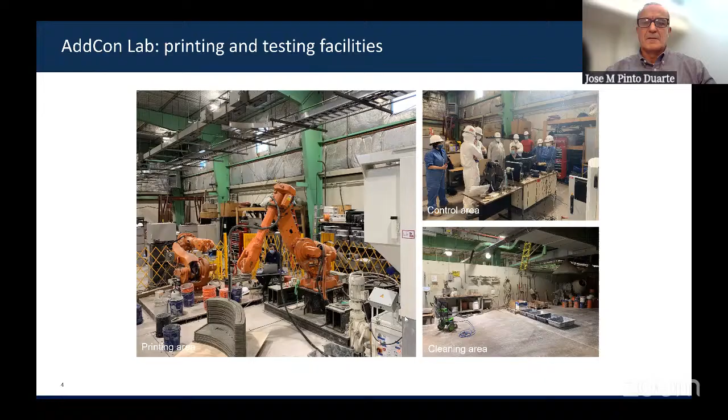So the mission goals of the lab is to support the integration of digital technologies in design and construction, contribute to the achievement of the United Nations Sustainable Development Goals. But I should say that the focus is not on technology, but on strategically deploying technology to address contemporary social issues.

So what's the solution? The solution that we have been advocating is to use digital design and production systems, meaning systems that are controlled by computer systems. Basically, the design system reads information about the context and outputs a solution, and the production system uses that solution to actually materialize it.

The basic idea is to have rule-based design systems that will even allow lay people to design their own houses. This works not just at the housing level, but also at the urban level. Then we use artificial intelligence to optimize the design for specific requirements, like minimizing energy consumption or maximizing the capture of sunlight and so on.

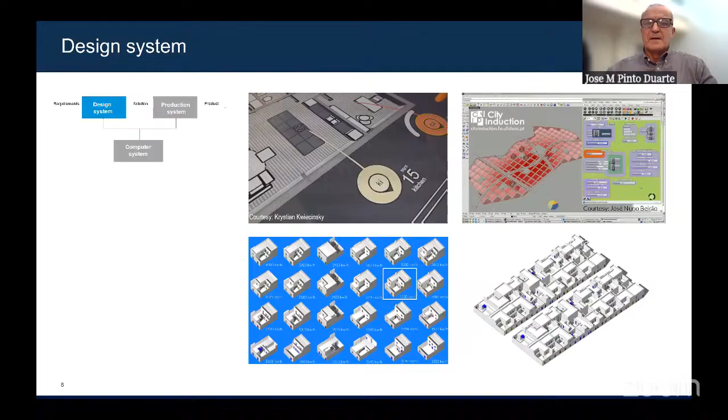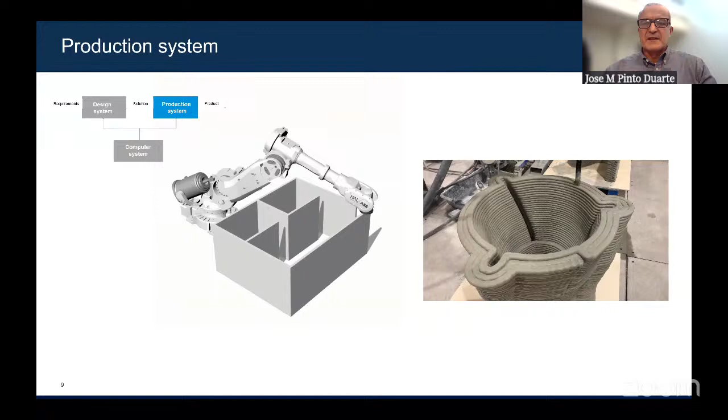The goal of the lab is to develop a mathematical model of the process of 3D printing. 3D printing is a very complex process with many different variables, like environmental variables such as temperature and humidity, the material composition of the mixture that's going to be extruded, the type of binder, the type of aggregates, the admixtures, use of fibers, and so on.

This has an impact on material properties, like flowability, printability, setting time, density, strength, and so on. Then you have variables connected to the printing system, like the dry feed rate, the water flow rate, the pump speed, the speed of the robotic arm, the length and diameter of the hose, and so on. Then design variables like the filament shape in terms of height and width, the number of filaments and layers, and the specific tool paths used to extrude the material. And then variables associated with the building itself, like shape, size, textures, colors, and so on.

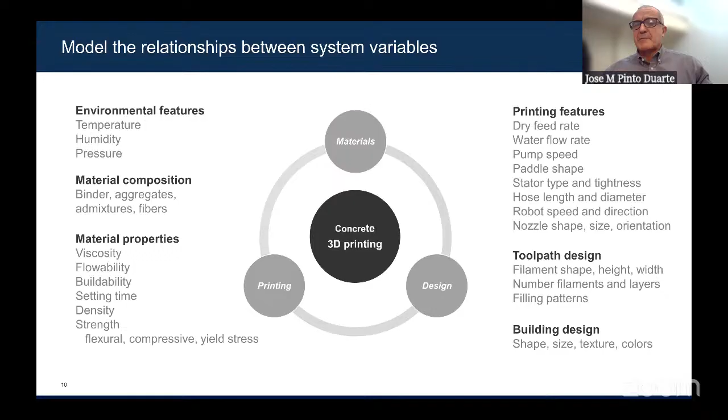What we are trying to do is create a mathematical model relating all these variables so we have complete control of the process. So let's talk about each of these elements one at a time.

About materials: our goal is to develop sustainable extrudable mixtures. As you know, Portland cement is not a very sustainable material because it consumes a lot of energy to be produced, and has very big CO2 emissions. So we are trying to develop new types of concrete that do not consume as much energy as Portland cement and have less carbon emissions. We are looking at magnesium oxide, magnesium sulfate, citric acid, and so on as the main trigger of the binder.

We are also developing lightweight mixtures, which you can obtain, for instance, by replacing river sand in the concrete mixtures with lightweight materials like cork granules, expanded clay, or styrofoam. The idea is to develop mixtures that are lighter and therefore have better performance in terms of thermal insulation, or do not impose such a big weight on the structure - the self-weight will be decreased. That's an example of the type of material we are developing.

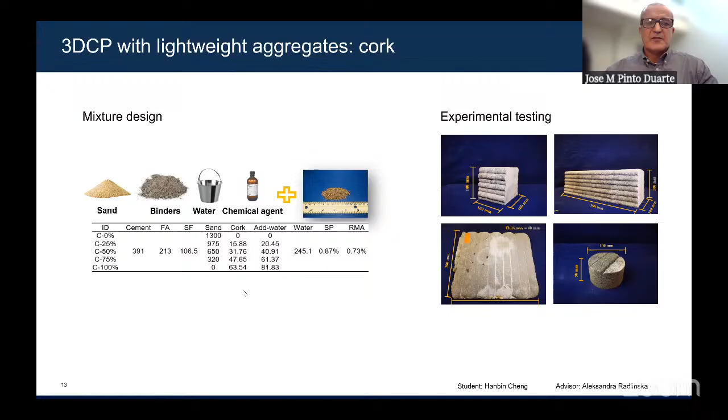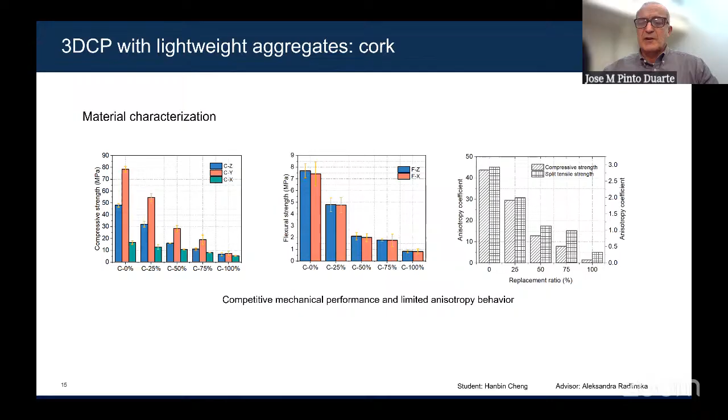What we do in this case is try to understand the material properties. For instance, we replace the river sand by cork in different amounts, like 25, 50, 75, and 100%, and see what properties we obtain. Is the material still pumpable? Does it flow? What's the open time? We also look at the mechanical performance of the mixture for different amounts of cork, and see if we can be within the range required by current building codes. That's what these graphs are trying to show.

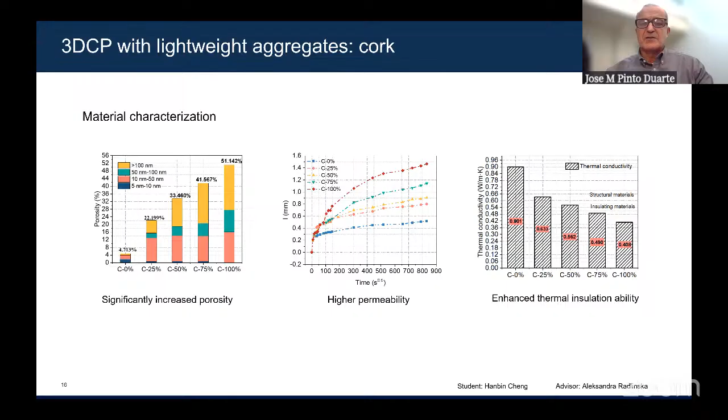In this case, also in terms of permeability and thermal insulation - as you can see, as we increase the amount of cork, the conductivity of the material decreases, so it gets better performance in terms of thermal insulation. So basically, you have to deal with all these aspects: strength on one side, thermal insulation on the other, pumpability as well, and so on. This requires extensive testing to find out what ranges of cork replacement allow you to have a mixture that works, that is flowable and has the right strength.

Another example is expanded polystyrene. This is another type of concrete we are trying to explore and develop. Basically, these materials decrease density and increase insulation properties of printable concrete, but also transform the mechanical properties to be more ductile, allowing it to withstand considerable deflection. So not just thermal insulation, but also improvements in terms of deflection.

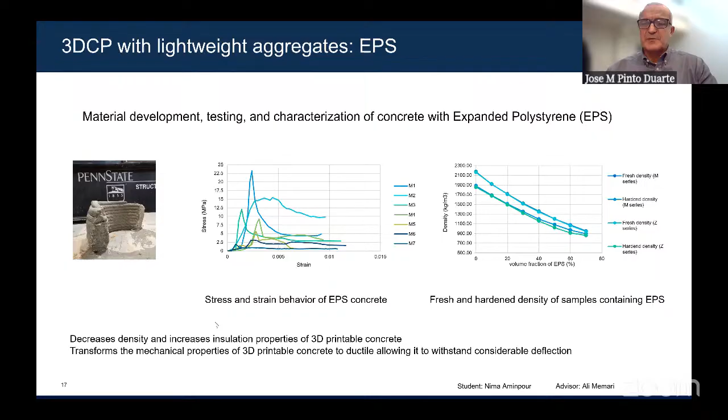This is the work of one of my PhD students a few years ago.

How can we accomplish this? You basically have two pumps, one with concrete with river sand and the other with concrete with cork granules. By changing the relative speed of each pump, you can increase or decrease the gradient of cork, and therefore, when you deposit the material in space, you deposit it with the properties you want, fully customizing the design of the building element.

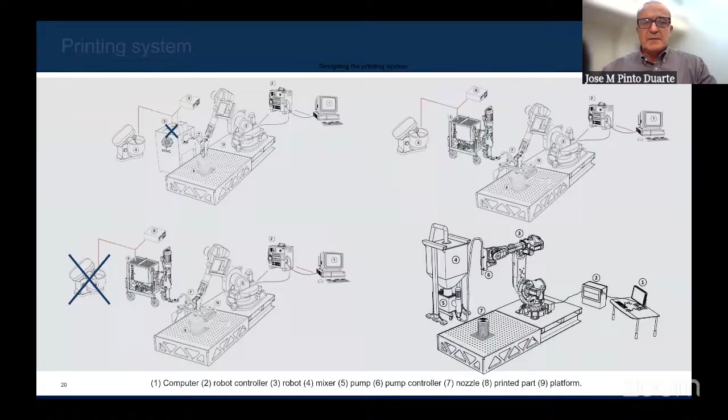Now about the printing system. We started very small, with a very portable robotic arm and a very portable printer in a small room. As time went by, we continued increasing the quality and performance of the printing system, and we increased the size, so we had to move the lab several times as we were developing it. At the bottom right is the system we now have at the lab.

A system to print with concrete needs a computer, a controller that controls the robot, and the robot itself. The mixer mixes the dry mix with water, then the pump extrudes the fresh material through a hose that ends at the nozzle, which is controlled by the robotic arm. The arm then moves according to the code instructions to print the parts on a platform.

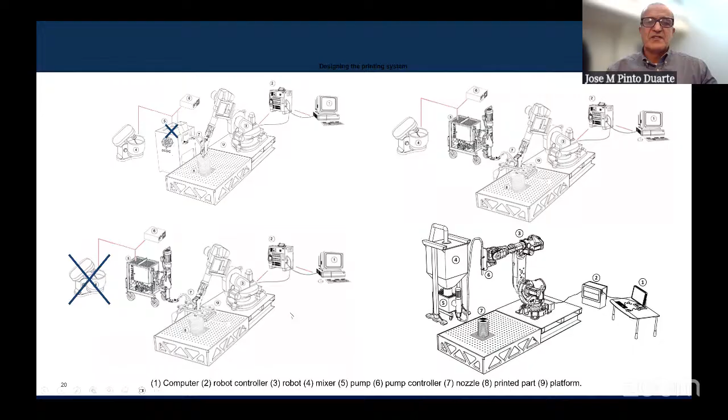We continued developing the system, and we created a company, X-Hab 3D, to sell the printing system we developed at the lab.

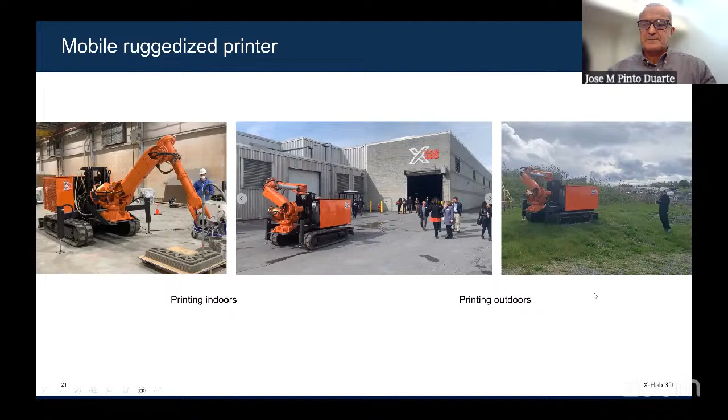Now, we've talked about the whole system, but there are also details that can be improved and developed in a more sophisticated way. For instance, we're developing a nozzle we call the smart nozzle, which has several capabilities. One is that it rotates to remain perpendicular to the tool path, so as you curve, the nozzle rotates to stay in the same position relative to the printed filament.

This has several advantages. One is to increase the strength of the material, but it also allows you to design more complex shapes, and to control the direction of fibers in the concrete filaments.

With the rotation nozzle, you can use different types of endings to extrude the material in different shapes. For example, you can use a trowel to smooth the surface so the lines become faded as you print, which increases the strength of the wall of the building component.

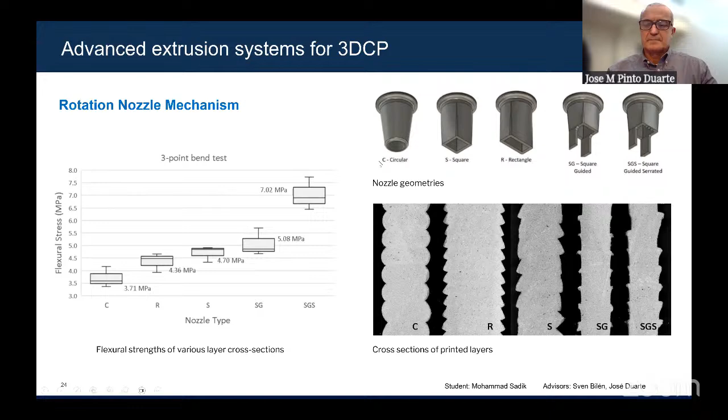And then the other capability is to add the admixture. There are different types of admixtures. One can be an accelerant. The accelerant reduces the time for the material to get hard.

If you do that immediately before extrusion, the material retains good flowability properties while it's going through the hose. And then once it's extruded, it will harden very fast.

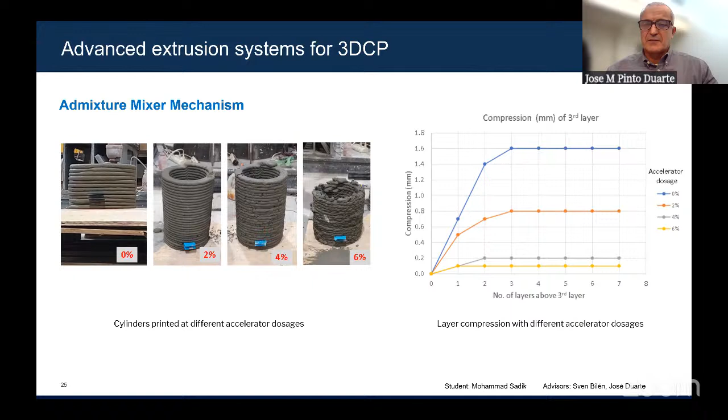And then another aspect is a closed feedback loop. When you are printing, we need at least 3 people: one controlling the robot, one controlling the extruder, and another overseeing the operations. You need to keep an eye on how things are going, like if the material becomes too wet or too dry.

So you need to adjust the settings in real time. For instance, you need to increase or decrease the amount of water, or the pump speed, or the robotic arm speed. So what we are trying to do is automate this process, finding a way to monitor the printing process that requires fewer people.

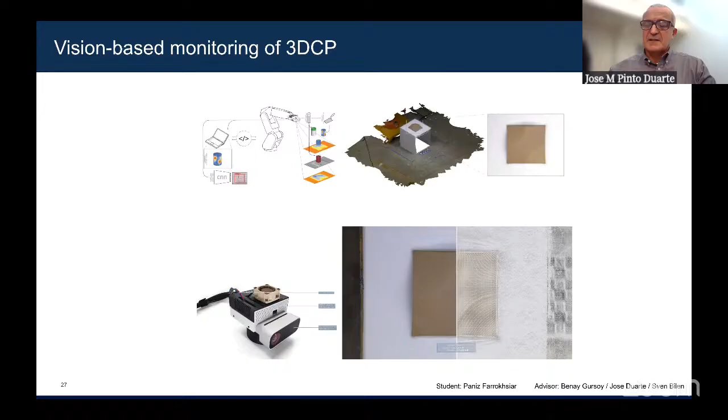So we are looking at vision-based monitoring of the concrete printing operations. We have a camera attached to the robotic arm that follows the printing process and is able to detect variations in the shape of the filament and immediately trigger procedures if something goes wrong.

There are different ways of using systems like these. One is before you start printing, like for instance if you want to print on a site that's not leveled or regular. We use this system to create a 3D model of the site. It will scan the site and adjust the toolpath to the irregularities of the terrain to make sure the nozzle does not get buried in the ground. So this is a use of the system before printing starts.

And then you can use the system during printing to monitor the quality of printing, the shape of the filament, the shape of the layer, the shape of the entire part, to see if it's deforming, and if it's deforming, what might be the cause. It could lead to structural failure if you don't act.

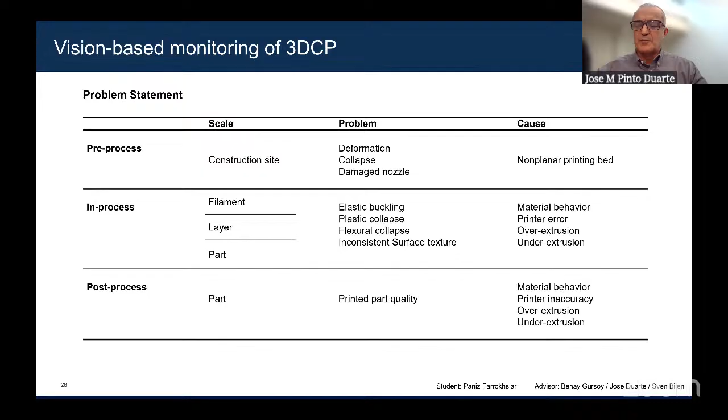So if you follow the process this way, you can change the printing settings to remain within the acceptable right values, so that the variables stay correct. You can also use the system after you print, just to compare the shape of the printed parts with the shape of the design and see if there were any deviations, to guarantee that we achieve good printing quality. So that's basically the idea.

This is the work of another PhD student to detect, predict, and prevent geometrical defects in concrete printing, and how to adjust the toolpaths and printing settings in real time to prevent that from happening. You can see some images of the machine and the process being used.

We are basically using shape grammar rules to decode what the machine sees, what the camera sees, and define and trigger the right action, which might be, as I mentioned before, the content of water, the speed of the pump, the speed of the robotic arm, or even a change in the toolpath.

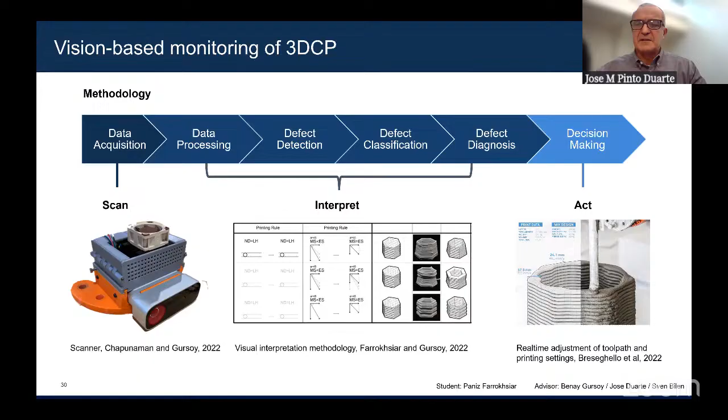So basically, we have 3 steps: scan, interpret what the camera sees, and then act to correct what's not going well. This is how you can use the system in a more elaborate way: data acquisition, data processing, defect detection, defect classification, diagnosis, meaning finding out what might be causing the problem, and then deciding which action to take to counteract what's going on.

So basically, with this way, we can achieve very good control of the shape of the printing filament, and you can adjust the toolpath in real time to changes detected during the printing process.

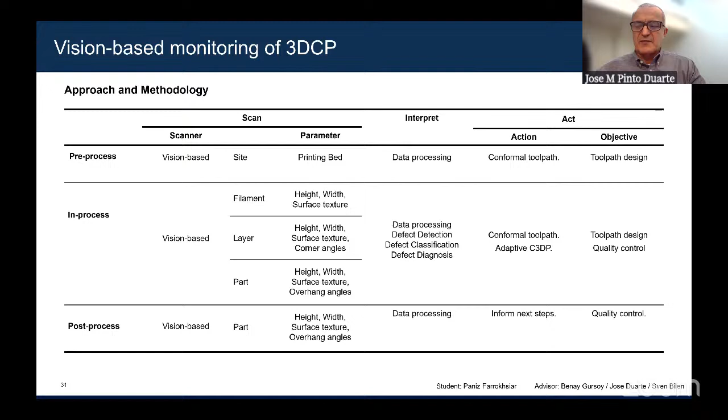So another area of work is reinforcement. As you know, concrete has very good compressive strength behavior, but not very good in terms of flexural strength. So it's important to use reinforcements like steel, FRP rebars, and other types of meshes to increase the flexural strength of the printed part. So we conduct several types of tests to find out the compressive and flexural strength of the mixtures we are producing, and then determine which type of reinforcement needs to be used.

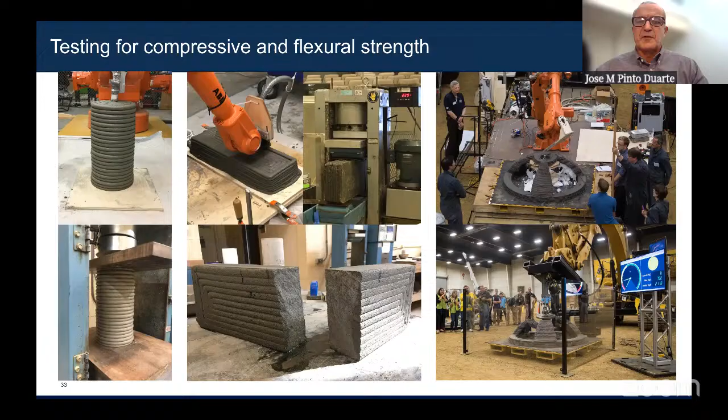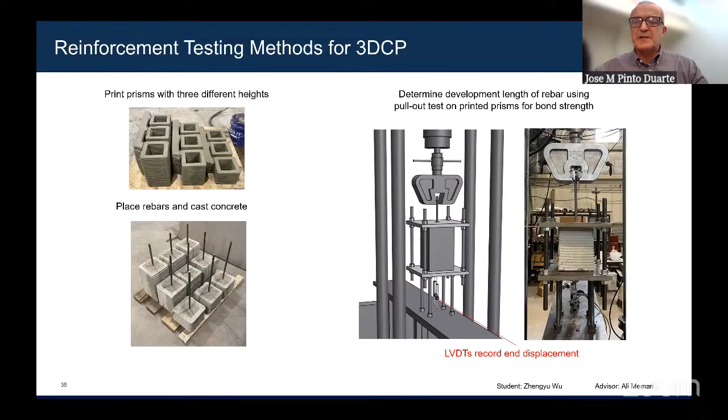We conduct several tests to understand how to improve the structural performance of 3D printed concrete with different types of reinforcement, including compressive strength tests and flexural strength tests. In this case, these are walls — we are designing a house to be built in Alaska. Alaska is a very harsh environment with lots of earthquakes, very strong winds, and large differences in temperature, so we need to make sure the 3D printed concrete has the right properties to endure such conditions.

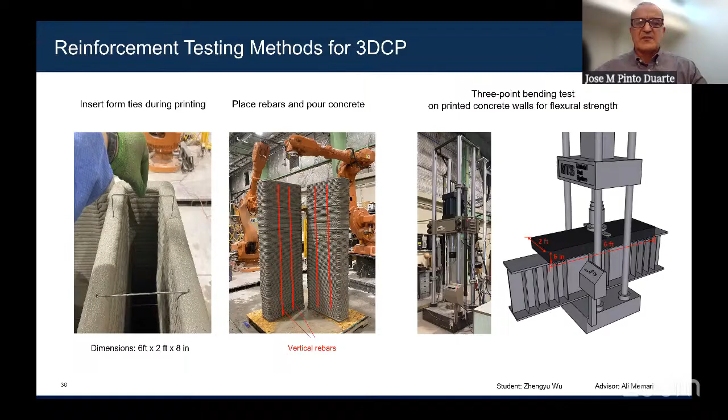So we printed wall segments and tested them for flexural strength to make sure they could withstand earthquakes and strong winds. Ultimately, we want to develop tools for designers of 3D printed structures so they can predict the structural behavior of parts with different types of reinforcement — basically extending finite element analysis to 3D printed concrete with reinforcement, so you have a design tool to use in designing these structures.

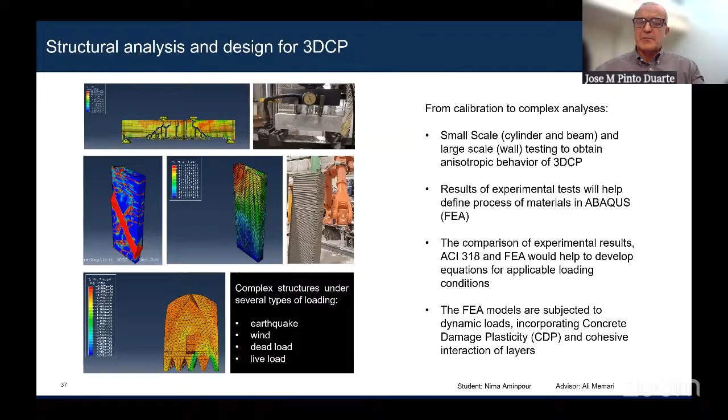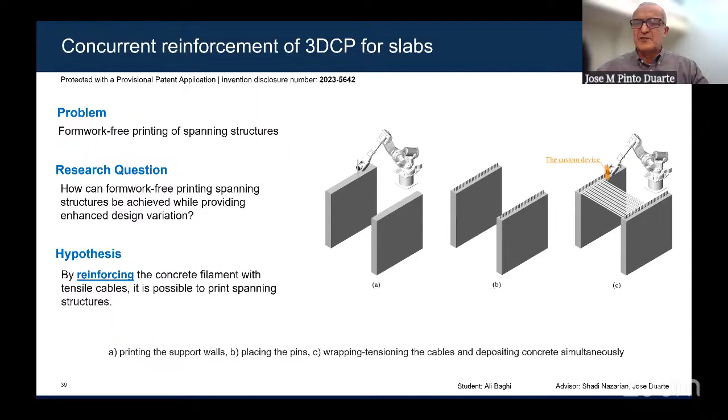The idea is to print the filaments with cables inside — you unwind a cable, and then print on top of the cable. This way you end up with a reinforced filament, so you can print slabs without any formwork, which is a goal so you can take advantage of 3D printing technology. That's the basic idea.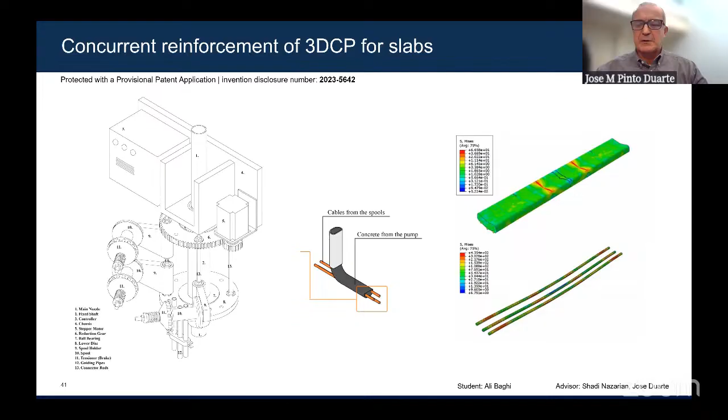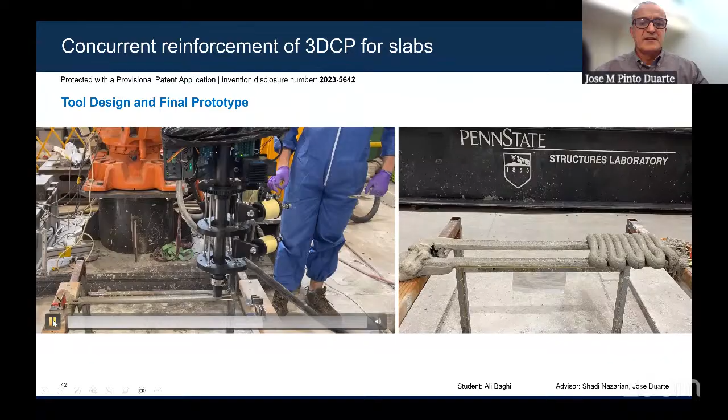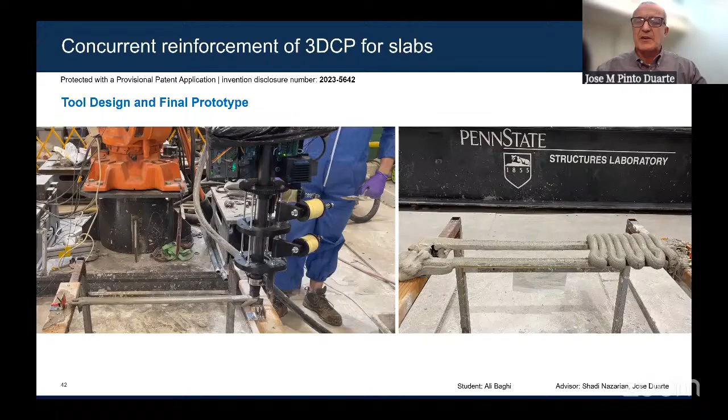This is a video showing the nozzle on this side, and the filament being printed. As you can see, the cables are being placed, and the filament is printed on top. On the right-hand side, you can see that you don't need to print the filament side by side — you can bridge filaments that are 8 centimeters apart, making the structure lighter as well.

For the design of additive construction, it's important to have tools. I'm going to talk about a platform we developed for the NASA competition. The NASA competition required us to design habitats for Mars, but we had to test the habitats on Earth — so we actually had to print an instance of the habitat on Earth.

Mars and Earth are two very different environments. As you know, Mars has lower gravity because it's a smaller planet, and because of that its ability to retain an atmosphere is also lower — the atmosphere on Mars is about 1% of the atmosphere on Earth.

And then you also have cosmic radiation. So it's basically an extreme case of a very harsh environment. So instead of developing two different habitats, we developed a platform. It's basically a BIM-based platform with four capabilities.

One is a generative system, a rule-based parametric design system that allows you to generate different configurations. You define the rules, and then you can create a universe, a potential universe of design solutions.

The second component does performance analysis for structural performance or thermal performance, so you're able to rate and rank the different possible configurations of the habitat design. Then you use optimization to find the best configuration, taking into account gravity, atmospheric pressure, cosmic radiation, and so on.

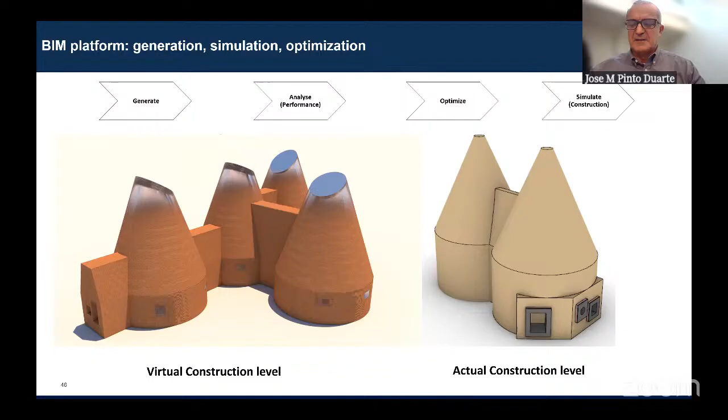So this is the construction simulation, a video that we developed that qualified us for the finals of the competition.

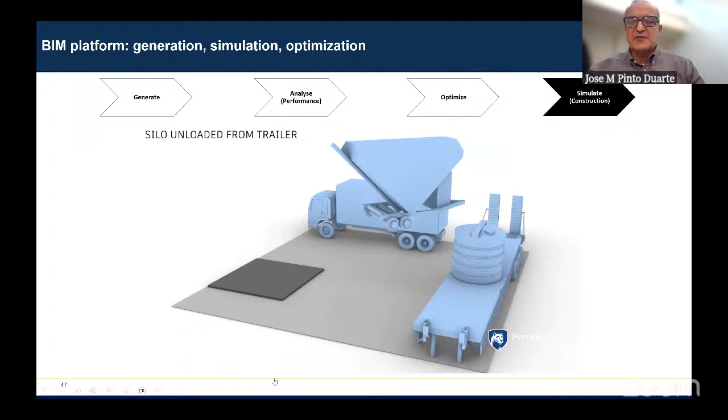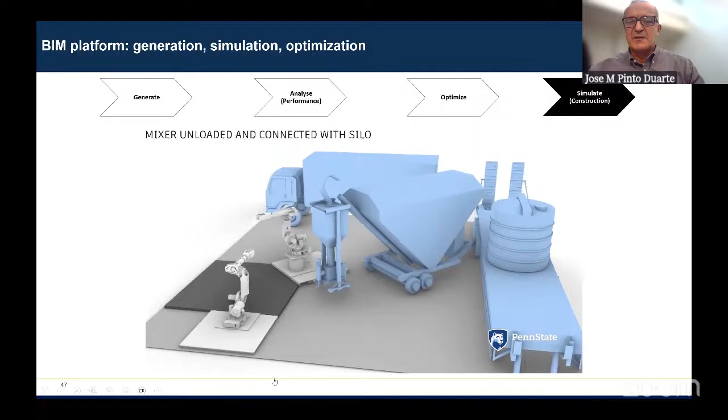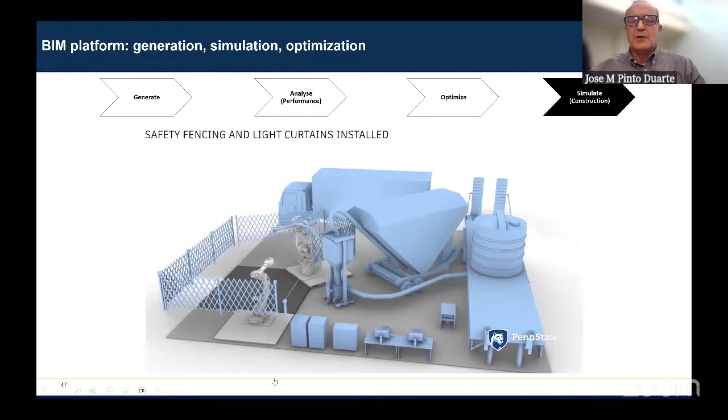We had a limited area of space to set up, so we needed to show that we could set up our system within the available area and then show how it would print. You see there's a big silo, a tank of water, and they both feed to a small silo and a pumping machine connected to the robotic arm, which is going to print while the other one places the window frames.

That's basically what you see here. It's starting to print, and then it's going to place the window frames at some point, as you can see in a few moments. While we were printing, we changed the toolpath design at the last minute.

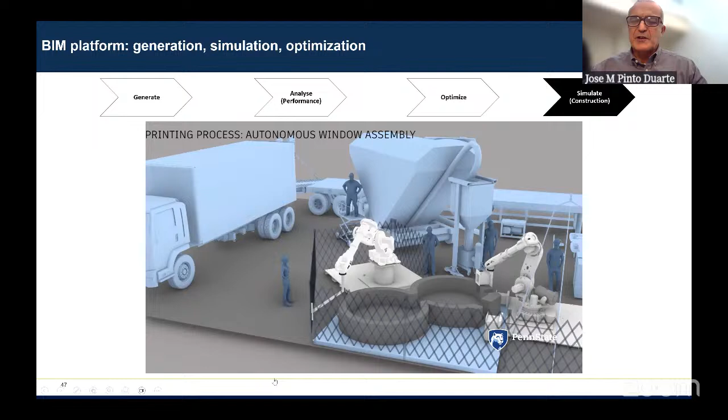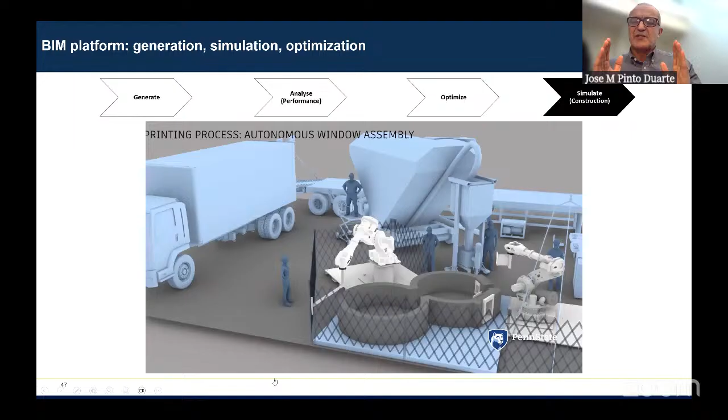There are two windows very close to each other with a very small pillar in between. Since at the time we didn't have the capabilities we have today, the pillar deformed, and when we had to insert the window frames, they didn't fit because the space was too small, so we actually had to use a hammer to put them in place. That informed the continuation of the research, as I'll explain later.

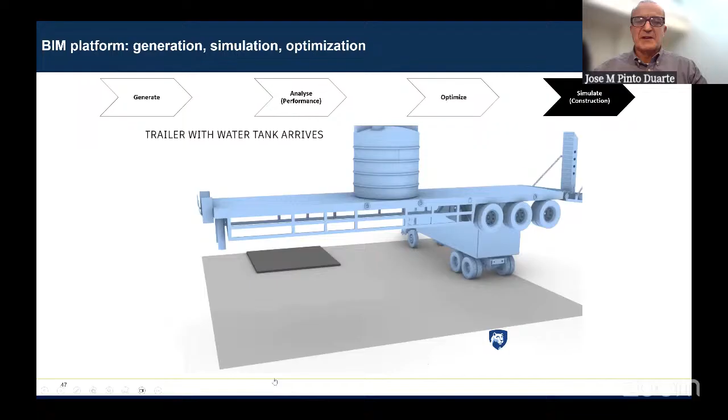Once we have this platform, we can continue developing tools to support the design of structures. One idea is to print not just the walls like everyone else is doing, but print everything—the foundation, the walls, the horizontal slabs, and the roof.

So we are looking into vaults and domes as a precedent for printing roof structures, trying to understand how they can be printed, and then developing tools to verify the performance of the structure.

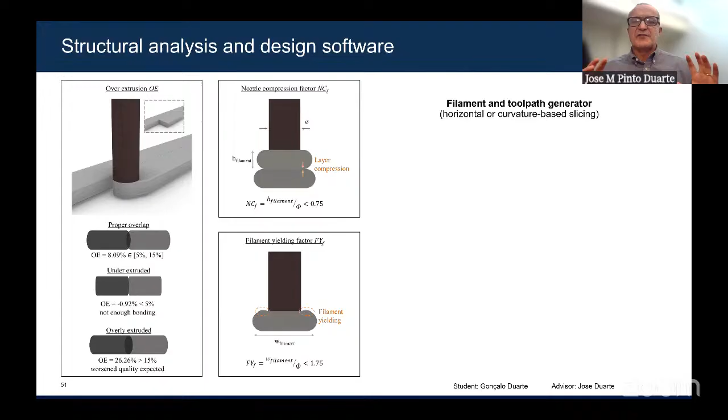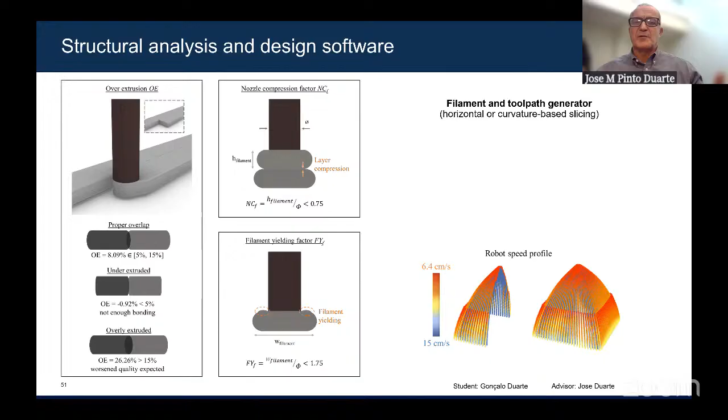What we're doing is assessing the structural performance of the concrete in its fresh state while we are printing. There are tools on the market to assess structures once they are in place and hardened—this has been used for cast concrete—but you also need to verify how the structure behaves while it's being printed, when the concrete is still in the fresh state.

That means different layers have material with different properties.

For instance, in this case, if you start printing, the bottom layers harden, and then when you go to the top, the bottom layers are hard, but the other ones are in intermediate stages of hardness. So you need to understand if the structure is strong enough to avoid collapse during printing.

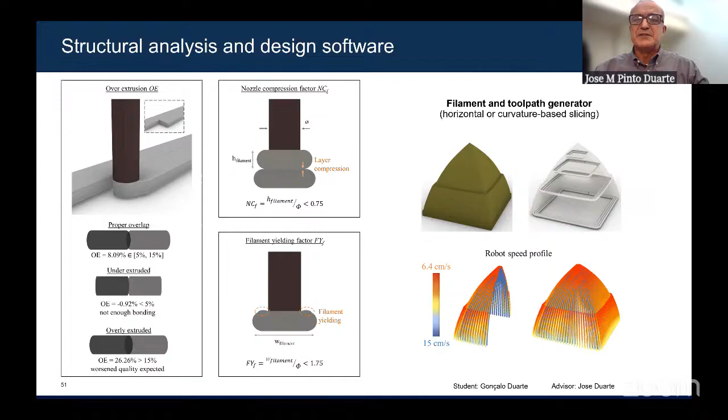So one thing we need to do is have an element of the system to predict the shape of the filament, so you know exactly, for instance, that the filaments have good bonding, both vertical and horizontal. So you need a filament predictor to understand the shape of the filament.

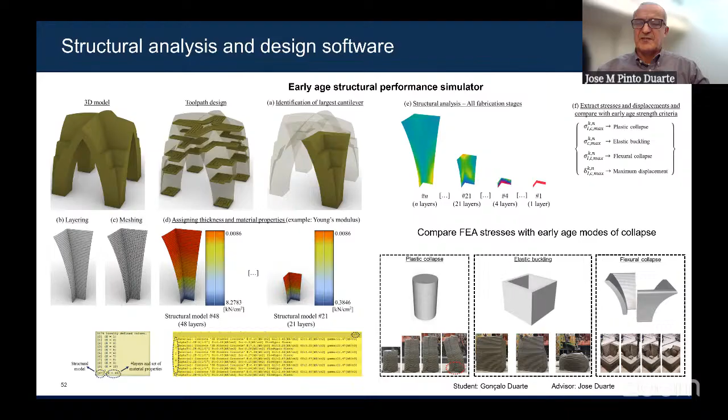And then you need to simulate the structural performance of the material, taking into account that different layers are at different stages of hardness and therefore have different levels of strength. Then you can do the simulation, the finite element analysis, taking into account these differences in material properties.

And then you develop the tool path generator. So basically, you generate the overall shape of the part, develop the tool path, do structural simulation during the printing, and then use optimization to find the best tool path design. Best in this case means avoiding collapse while decreasing the use of material, and therefore decreasing printing time.

As you could see, in this case the vault still uses a lot of material, and it's still very steep. So we are trying to find ways to decrease the angle so we can print vaults that are shallower. That's exactly what we're doing, looking into different slicing strategies.

The traditional slicing process is horizontal. You basically slice the part horizontally to reconstitute it during printing, but you can also use different printing strategies that are not necessarily horizontal. For instance, in the case of vaults, you can use radial slicing or inclined slicing.

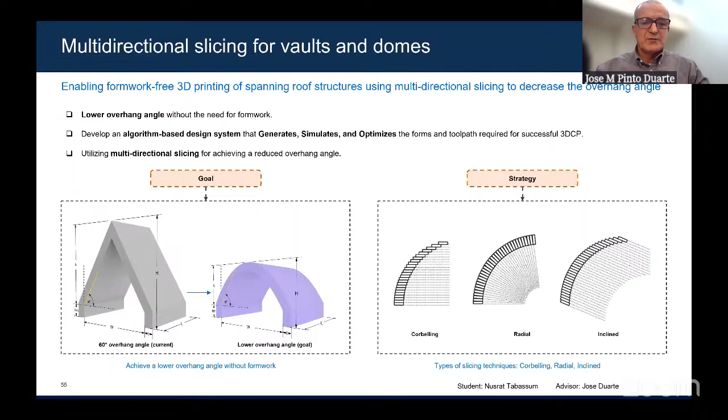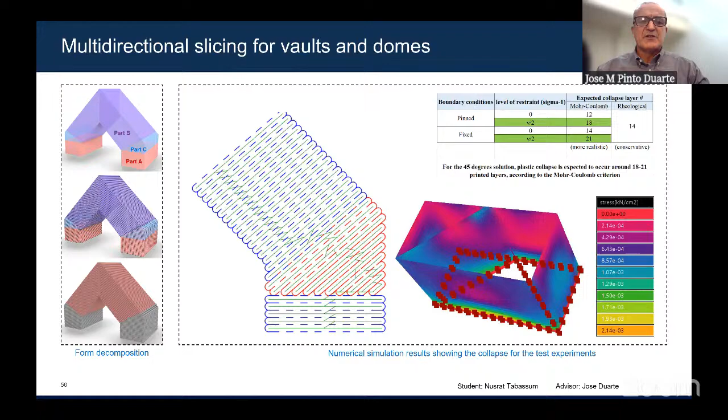Radial slicing is very complicated because it means you need a layer with varying height. So let's see how this can be achieved. In this case, we are just using horizontal and diagonal slicing, trying to understand how to move from one to the other and see if the part is printable.

You can see the parts—it looks like it's about to collapse, but it did not collapse. It's being printed this way. There's a lot of over-extrusion on the bottom part, but this was a successful test in this case.

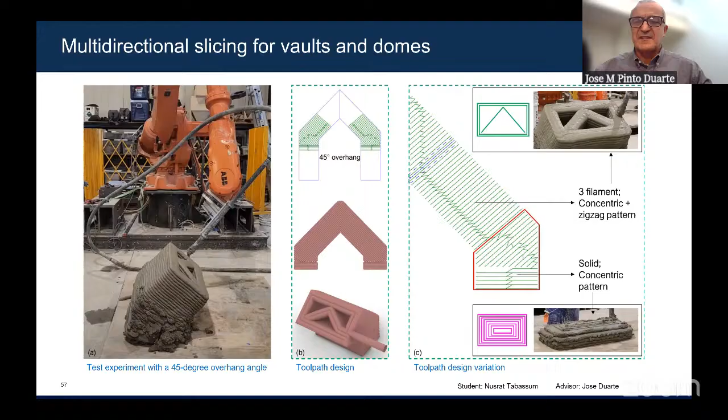So we are extending the BIM platform to do the structural analysis of vaults and domes, with varying slicing strategies and different design strategies as well, with the idea of printing the entire structure: the foundation, walls, and roof.

As you can see, you can use different types of design strategies to increase the strength of the part and make sure it will not collapse, because the idea is to print the vaults and domes without any kind of support.

The other one is to understand the material behavior. For instance, I mentioned before that when we were printing for the NASA competition, there were two windows very close to each other with a small pillar in between, and we changed the tool path.

There are basically two possible strategies. One, you would go around, stop printing, bridge the opening, print the pillar, continue, bridge the other opening, and continue printing. We changed the tool path at the last minute, so we would print the walls around the windows and then print the pillar at the end.

The problem was the pillar was too small, so when it was printed, it allowed a lot of deformation. Because of that deformation, we were not able to insert the window frames automatically. So this triggered work to understand how the material deforms.

Basically, if you need to print a cylinder, a small part, and you don't do any kind of compensation for the deformation, what's going to happen? You end up with a truncated cone, because the bottom layers deform under the weight of the subsequent layers. So you need to change that.

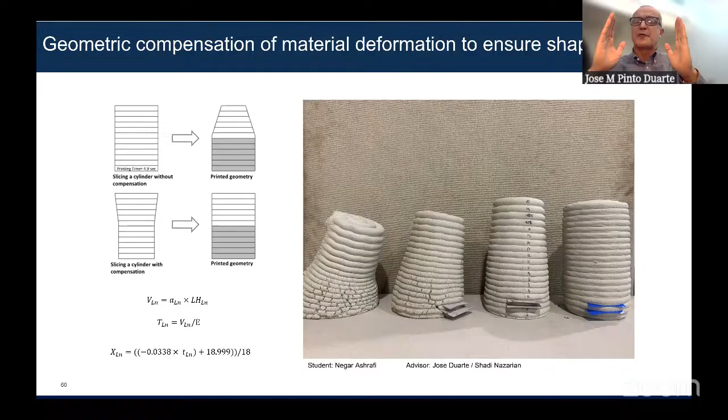You can see the successful one is on the right-hand side. In this case, we compensated for both horizontal deformation in terms of width, but also vertical deformation. So what happens is when you print and the bottom layers deform, they increase their width and become shorter as well. So the distance between the nozzle and the previous layer increases over time. So you need to compensate for both deformation in terms of width and in terms of height as well, so you can get the right shape.

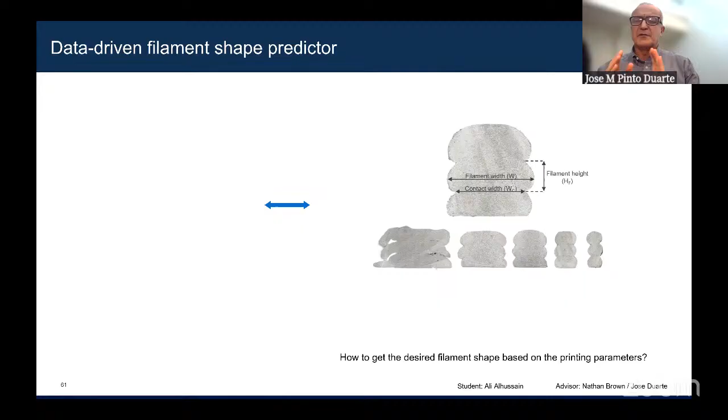Now we are developing a more sophisticated type of filament predictor, basically using machine learning to understand what combinations of printing settings lead to filaments with certain properties. These are different variables: the diameter of the nozzle, the height of the filament, the distance between the nozzle and the printing bed, and the speed of the robotic arm. You need to understand how these variables are impacted by printing settings like robotic arm speed, pumping speed, extrusion rate, and so on.

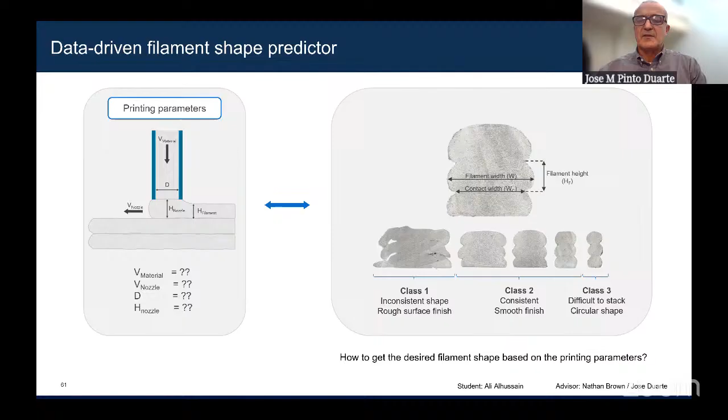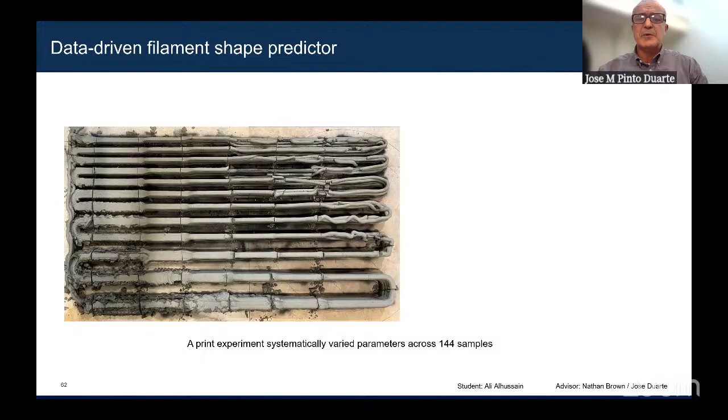So what we did, we conducted several experiments. As you can see, we printed a filament, and each segment of this filament has different printing settings. You were changing the settings in real time, and you can see some worked really well with very good shape quality, where others have terrible shape quality, and some eventually collapse.

So this was studied, and we classified the resulting filaments into different categories. Then we used machine learning to understand the correlation between the printing settings and the quality of the printed filament, to find out basically what printing settings lead to good filaments. Then we can use this system to adjust the printing settings before printing, or actually in real time as well.

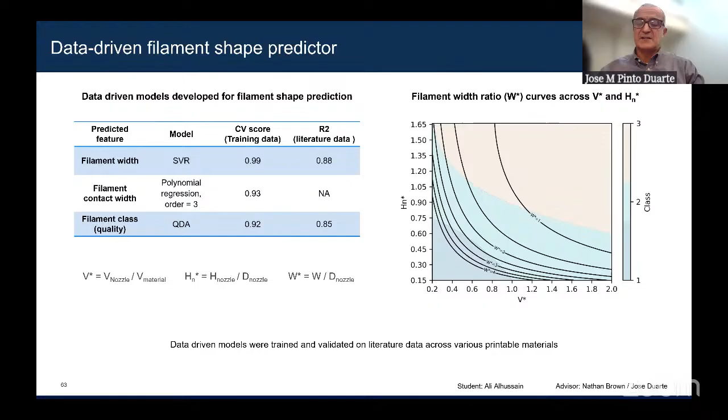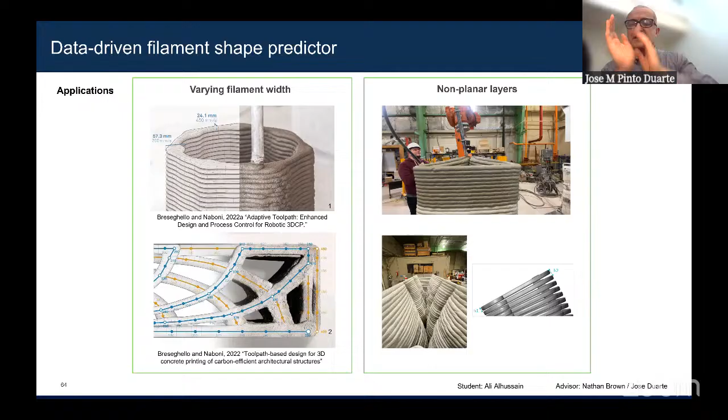So this allows us to print filaments with varying width, like you see in this case, but also with varying height. In this case, you see a structure that we used radial slicing for, so the layer has a varying height, and we use this algorithm to control the printing process to get the layers with that type of shape.

Additional research thrusts. So basically, for instance, for environments like the moon or Mars or even Alaska, you need to develop a completely sealed structure. In the case of Alaska, air leaks are terrible because they lead to huge energy consumption, because in Alaska you can get to -50 Celsius degrees. So you need a completely sealed structure to make sure you don't lose any energy.

And then you have to do durability tests. In the case of Alaska, we are working with the University of Alaska in Fairbanks. So we printed concrete parts and put them in artificial environments that simulate the freeze and thaw cycles that exist in nature. Basically, you go to a certain temperature, then raise it and go back down again, and so on, to see if the printed concrete is durable enough to withstand the rigors of the climate.

We are also developing research to automatically place technical installations in window frames or reinforcement, and so on. As you can see in this case, a window frame is being placed. These were tests that we did before the NASA competition, in preparation for the finals. You can also use the same system to place reinforcement, as you can see in the bottom image. So you'll see the frame being put in place.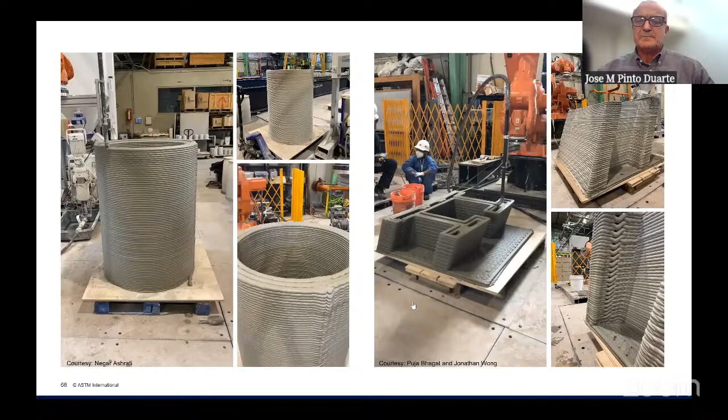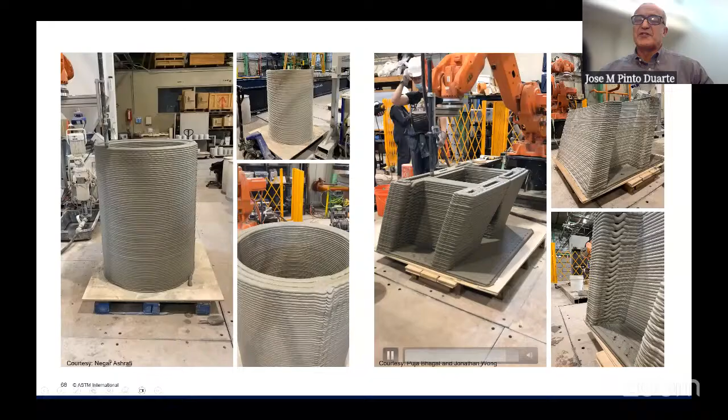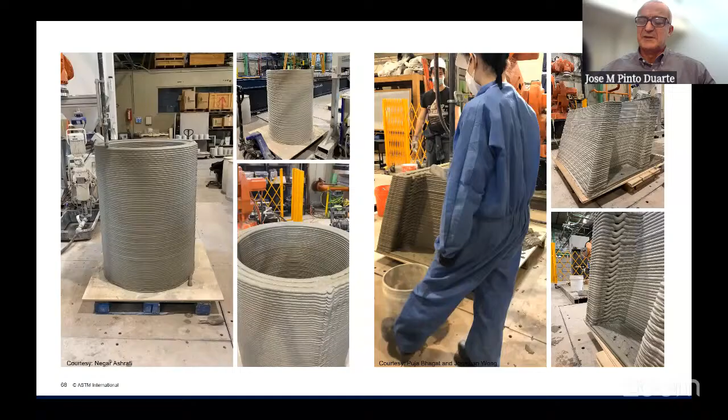What happened in this case is in the design of the toolpath, they designed it in a way that when you transition between layers, you went back onto the layer that had just been printed. So it did not have enough time to harden. When you print the next layer up, it deforms too much, and that's what led to the collapse in this case. So you need to take that into account in the design of the toolpath, and that's why you need the simulator and toolpath optimizer to make sure you avoid situations like this.

So I'm going to show some projects that are being developed at X-Hab 3D. X-Hab 3D is a company that was created as an offshoot of the AdCon lab. So it's a startup company.

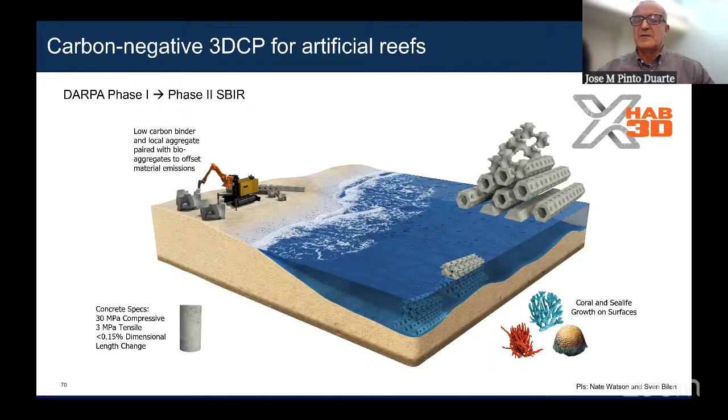This is a work where the goal is to design and print artificial coral reefs to protect the shore. You can see the complex shapes that need to be printed, and that's exactly what we are doing. We are also using different materials, using the functionally graded materials idea. We have concrete in these bottom parts, and the core is actually a different type of concrete than the outer layer. The outer layer, in this case, is a very strong concrete to guarantee structural stability, but the core is a different type of concrete that uses hemp to do carbon sequestration. The idea is to contribute to avoiding climate change.

This is another work that's being developed, actually using microwave technology to sinter concrete on the moon. In this case, you avoid the use of water and use microwaves to sinter the concrete.

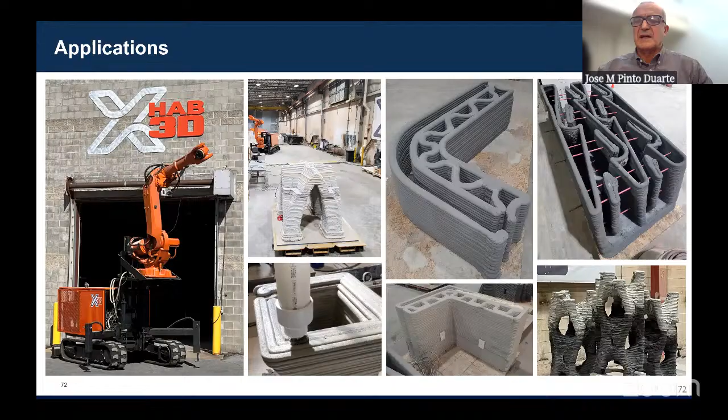Some examples of the work: you can see the printer on the left-hand side, with the robot arm using the lift, and some of the complex shapes we're printing for clients. That's part of the research we're developing.

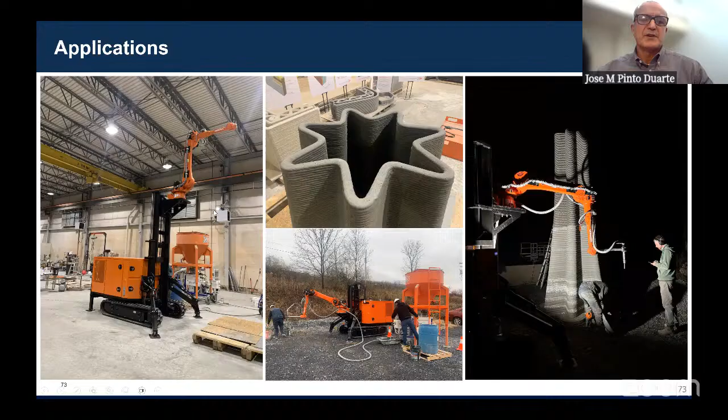This is the section of the walls - a printing test we ran in the lab before going out and printing the column. The column is not finished yet, so today we're going to print the last bit of it, so you can see how high you can print with this printing machine.

Going back to the beginning, the housing projects. We have several ongoing projects for housing. This one is for Alaska. Basically what we did: we analyzed traditional Alaskan housing - by traditional, I don't mean igloos, I mean which type of houses are currently used in Alaska - and did a study of them to develop a shape grammar.

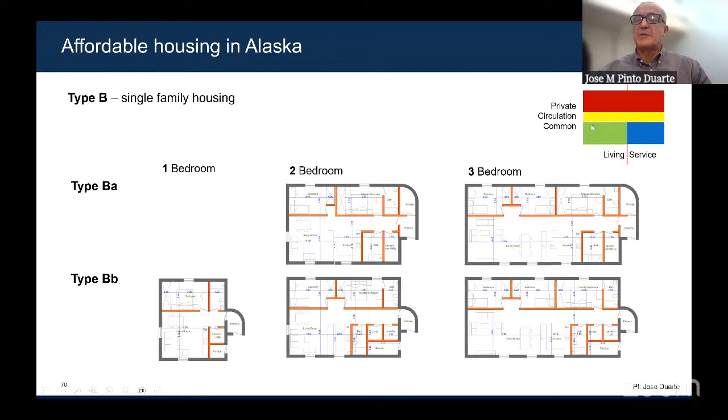We have the living and common areas on one side, on the other side of the circulation. So the division between private and common areas is defined by the circulation, as you can see at the bottom. This is the one we're actually exploring - basically you have the service area on one side of the corridor.

So this has several advantages. The idea is not to use the walls to run any kind of pipes, so you keep the pipes on the floor. By using this strategy, you're basically creating a wet area on that side of the house. You see the house with different numbers of bedrooms. Because if it's Alaska, we need what they call an Arctic entry - a transition space between the outside and the inside, so that when you open the door there's not a loss of energy.

Remember, it can be at minus 50 Celsius degrees outside. And then studying different strategies to place the house on the lot. So this is the lot size of the prototype house that you're going to build, and basically the lot can have two houses. This is actually a study on how the houses could be laid down on site.

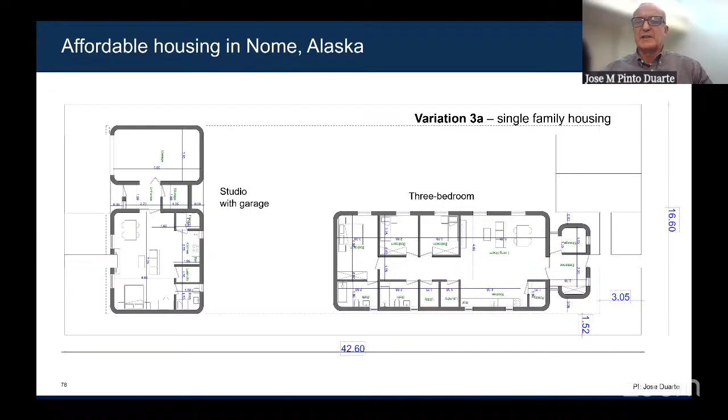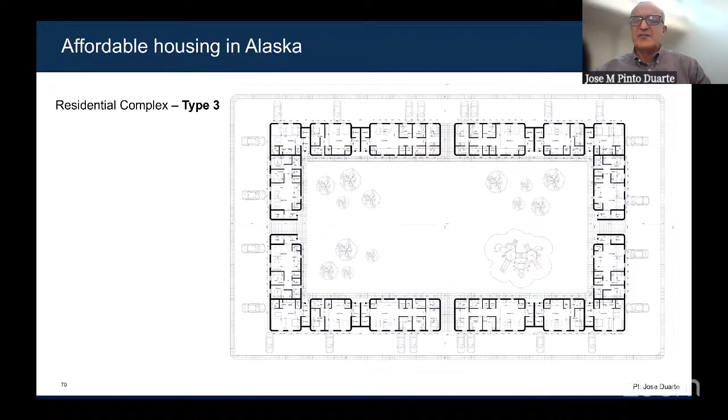But the idea is not just to print the house, but to print housing complexes. So in this case, all the houses are different, and in this case, 4 different blocks with all the houses using different strategies. In some cases you have the service area overlooking the courtyard, in other cases it's the opposite, and so on.

So this is the house that's going to be printed this summer. Basically, it's a 3-bedroom house, and it's one of many possibilities. That's the one that the town hall chose to print. And you see the construction details of the house.

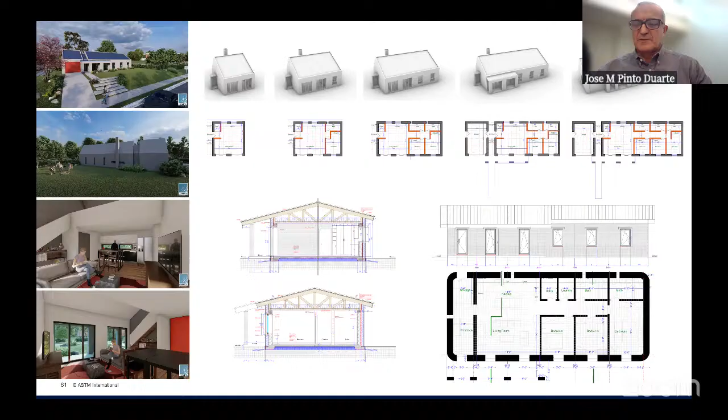Because it's the first house, it's a prototype house, we are not taking too many risks. We are just going to print the walls in this case. The foundation is a slab on grade, a cast slab on grade. It needs to be completely insulated. So even when you design the wall, you need to design in a way that you completely avoid any kind of thermal bridge, which was a very big challenge in this case, but I'll show you how we overcame the problem.

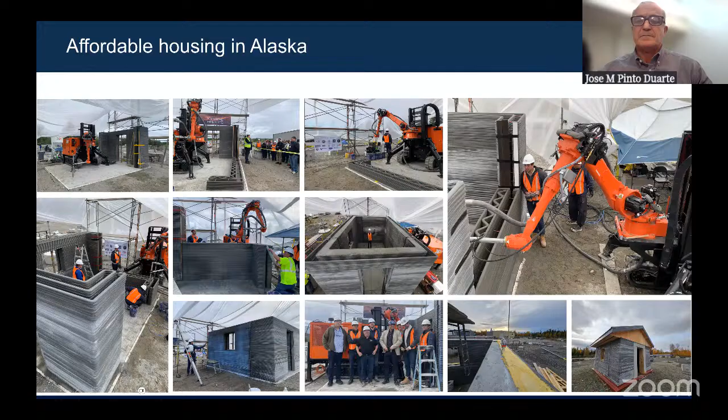So in conclusion, we have the technological means to provide everyone with a decent home. The technology used to colonize outer planets can help solve housing shortage on Earth. So it does make sense to do this kind of investment, studying how to build houses on the moon or on Mars, because the technology can be used with many advantages on Earth as well. So the opportunities for the additive manufacturing of construction are tremendous.

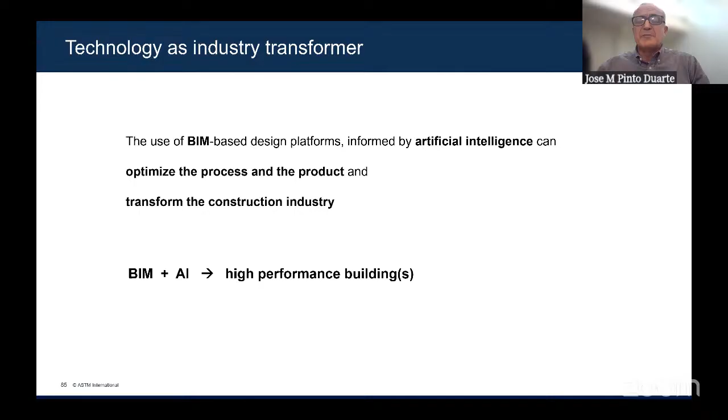Very big opportunities. The use of BIM-based design platforms informed by artificial intelligence can optimize the process and the product and transform the construction industry. So basically, through the use of BIM and artificial intelligence, you can design buildings that have very high performance. This slide tries to show some of the advantages.

Linking features of the process with advantages like high user satisfaction, increased safety. You increase safety by decreasing the amount of people on site because everything has a high degree of automation. But you can also lower the construction time because it's much faster to build houses this way than using traditional means, and therefore you can also lower the construction costs.

And because you can design buildings that have high performance, you have a lower operation cost, so you consume less energy. But you also have a lower maintenance cost because you are avoiding things like interfaces between different materials as much as possible. As you know, these interfaces are actually a source of building pathologies, and by avoiding that you're decreasing maintenance costs as well.

And because we are using sustainable forms of concrete, and because we are saving energy and using less material, the ecological footprint of architectural housing with this technology is lower. It also gives you increased design freedom, so you can build and design shapes that would be very difficult or costly to build and design otherwise. And you can play with the textures — in the future, we can also play with colors as well.

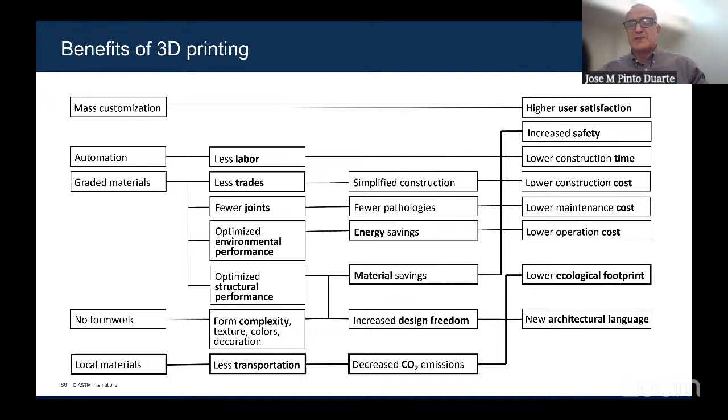And because we are using local sources of materials, we are decreasing CO2 emissions due to transportation of materials across long distances. So in conclusion, with additive construction, we can build safer and faster houses that are customized, more affordable, high performance, and aesthetically pleasing, with a lower ecological impact.